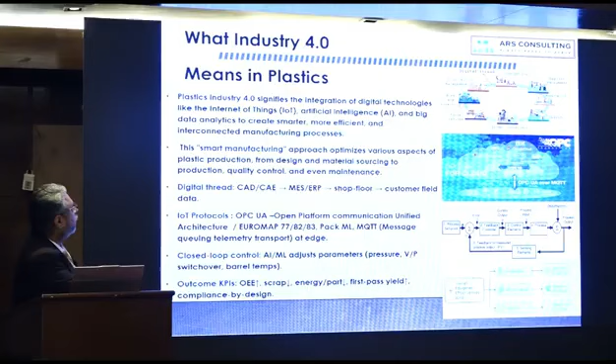Now, what exactly does Industry 4.0 mean? Industry 4.0 does not just mean integration of software into things.

It is a simple term, smart manufacturing. Everyone does manufacturing. How do we reduce rejection, improve productivity? Already there are many QS systems available, many systems available. How can smart manufacturing be achieved?

That is what we are going to talk about in Industry 4.0. Now, why exactly does AI/ML matter in plastics? AI and machine learning are crucial today, not only because of competition, not only because of getting obsolete, but also because it transforms traditional manufacturing into smart factories. Today, maybe Toyota, maybe Honda, or any car manufacturing unit, everyone is going into smart manufacturing. Then why not in plastics?

So here the most important aspect today is sustainability and regulations. That is EPR and recycled targets, and the opportunity for sustainability is reducing scrap, energy, downtime, and improving quality.

Now, AI/ML can be applied into four major broad categories of plastics. One is injection molding, where we can do defect detection, cycle optimization, and energy efficiency. Extrusion, we can do thickness control, process stability, and real-time monitoring. Rotomolding has already been touched on in the previous presentation, one is temperature profiling and predictive quality control.

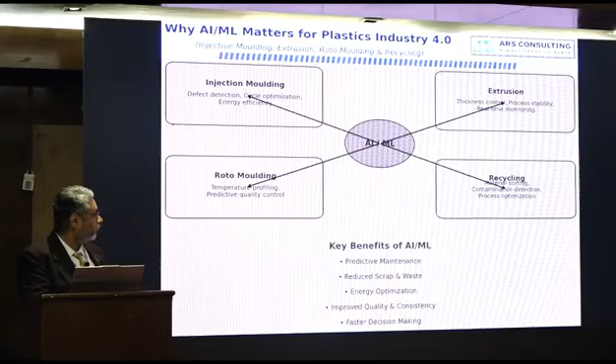Now, what are the myths? Everyone thinks that once AI comes, automation comes, our jobs will go away, manpower will be at risk, unions will form. Not really. It is still a myth. Why is it a myth?

Concern: automation removes jobs. Not really. In automotive AI, ML, IoT, it is just automating the task, but not the jobs. You need a programmer, you need a performer, you need a person to access the IoT. So it will not take away the job.

Second, it reduces the operator need. Not at all. Operators become smart machine operators. So we are elevating the operators. We are not taking away their jobs.

Third, data replaces decision making. Not at all. Data just supports human management. Ultimately, the human resource is the one who decides.

Fourth, machines control everything. Not really. Humans train the machine. The machine does not train itself. Humans train the machine, monitor and optimize the machine.

Last, as I said, everyone's job will go away. Not really - loss of employment doesn't happen; upskilling happens in AI and ML, and reallocation of manpower. So if anyone says AI/ML will take away jobs, we can confidently say no, not at all. In the plastic industry, we are creating smart manufacturing, so it will create more jobs for human resources.

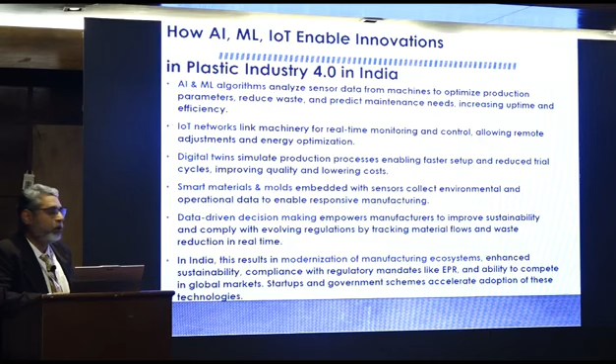Next, data-driven decision making. As I said, whenever we need a decision to be made - whether this particular shift, this mold we are running, is it really effective, particular rotomolding process, yes there is thickness control - that decision making needs data. That data is fed by this AI/ML. So in India, most of the modernization of manufacturing ecosystems is now getting enhanced with sustainability, compliance, and regulatory mandates like EPR. So that goes with AI/ML.

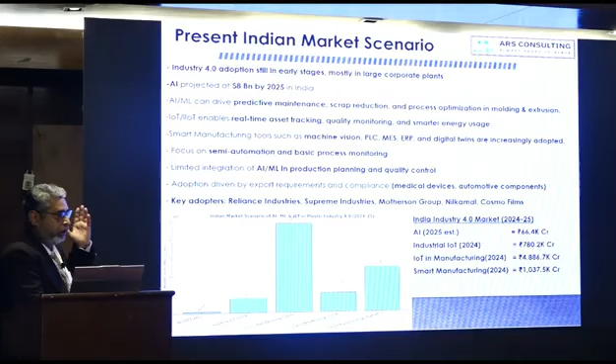Next, present Indian market scenario. We talked about global, now how it works in India. I have got the data from valid and trustworthy sites, marketing research insights.

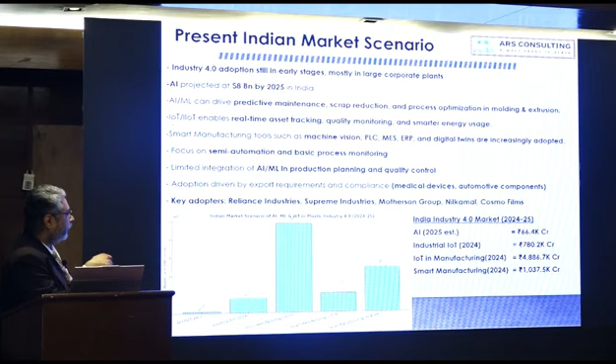The AI potential is around 66,400 crore, industrial IoT is around 780 crore, IoT market potential is around 4,886 crore, and smart manufacturing is around a 1000 crore market. Venturing into this definitely involves higher capital and resources, but the market is really growing.

Next is open platform communication unified architecture, which does machine to machine communication. If we have say 100 machines on a shop floor, it is not possible to communicate from one machine to another manually; that job is done by AI/ML. This is what we call open platform communication unified architecture. Two specific softwares, Euromap 77 and Euromap 83, have been built on OPC UA to define the interface between the injection molding machine and manufacturing execution systems.

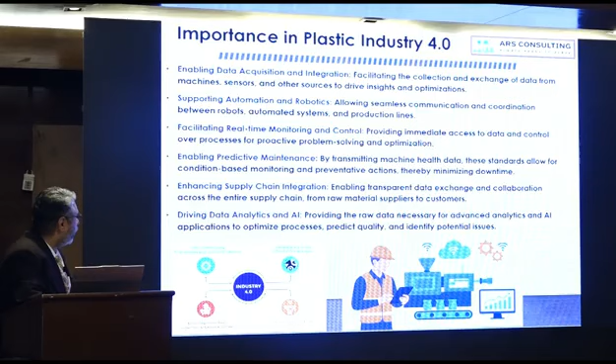Now, what is the importance? Again, enabling data acquisition and integration. Next is facilitating real-time monitoring and control. Third is enhancing supply chain integration and driving data analytics and AI.

Now let me give a brief on how injection molding can be implemented with this AI so that it really works as smart manufacturing.

High data density per cycle - say for example, as Sandeep sir mentioned, there is so much data: clamp force, melt pressure, cavity pressure, screw position. All this data can be fed into the system, so that we don't have to search for a manual or anything.

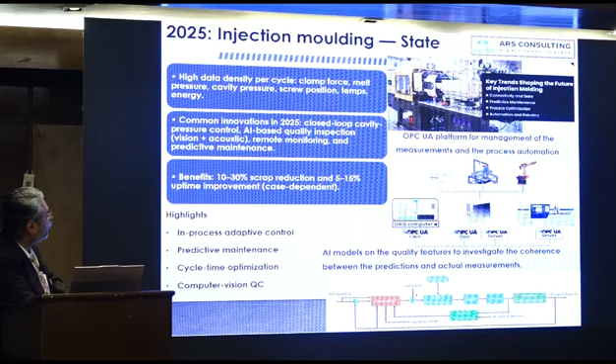Next, the common innovations: one is closed loop cavity pressure control, and AI based quality inspection, meaning we don't have to visually inspect the components. Through software, we can have a closed loop system to control quality, and remote monitoring. Before any unforeseen circumstance or upset happens in the machine, that can be handled through predictive maintenance.

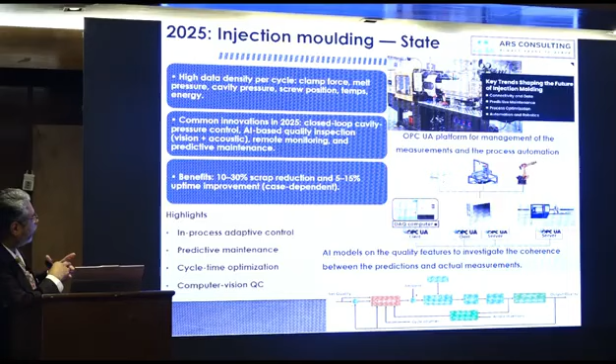What is the benefit in injection molding? I'll cite examples as well - there is a 10 to 30% scrap reduction, and 5 to 15% uptime improvement.

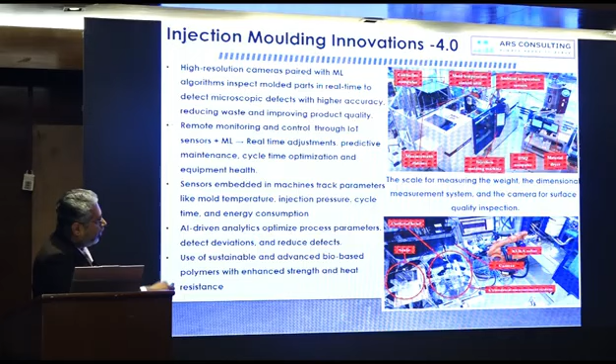Now these are a few specific examples I have given - hope this is visible. These are the areas where AI has been applied: the scale for measuring weight, the dimensional measurement system, and the camera for surface quality inspection. If we depute a QA person for each activity, we need at least 6 to 7 people to do that. But if we depute an AI/ML system, it does everything together in one shot.

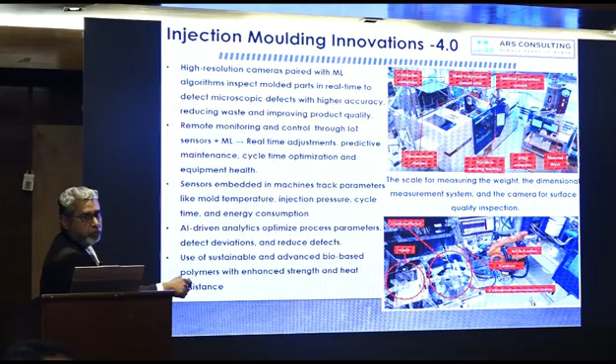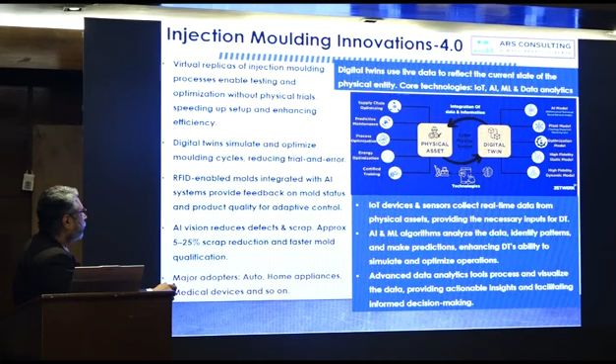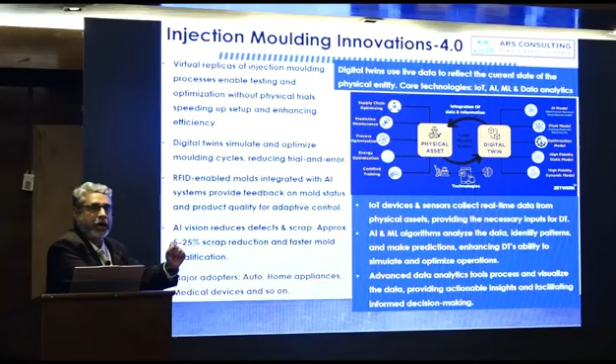Next, RFID tags can be attached to the components. Suppose if there are 30,000 components made which go into the assembly line, and any particular part is found to be defective, that can be retrieved through RFID tags. Through a manual batch process, it would be very difficult for us to track it.

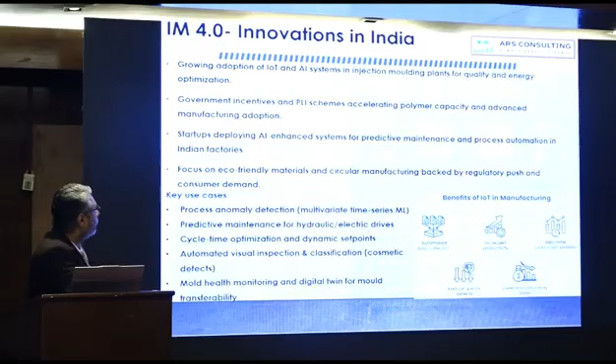Next, what are the innovations happening in India? One is the growing adoption of IoT and AI systems in injection molding plants. Second is many startups - I'll give examples and case studies in the coming slides. These provide AI-enhanced systems for predictive maintenance and process automation in Indian factories.

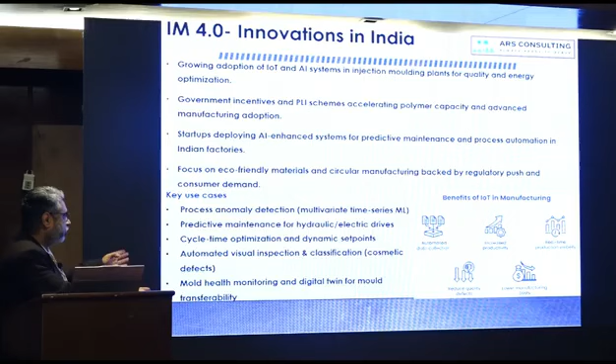What are the key use cases? One is process anomaly detection. Second is predictive maintenance. Third is automated visual inspection. Fourth is mold health - when a mold completes, say for example, 5 lakh shots or 10 lakh shots, that health monitoring can be done by AI/ML itself.

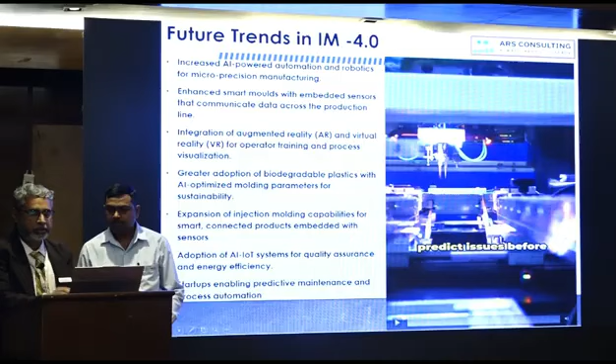Let's talk about IoT, the Internet of Things. Sensors on machines collect data and send it to the cloud. This means faster problem solving and less downtime.

Next up, AI and machine learning. These technologies predict issues before they happen, making your factory more efficient and cutting costs.

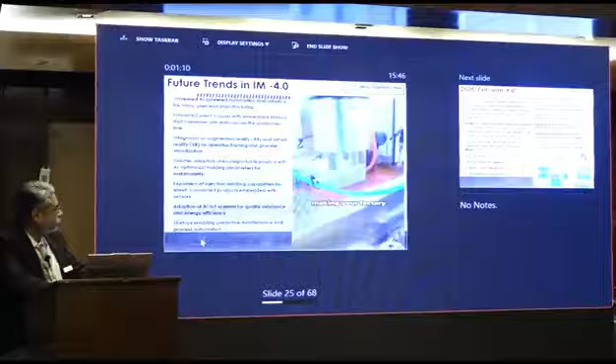And don't forget about robotics. Robots are taking over repetitive tasks, freeing up humans for more complex work.

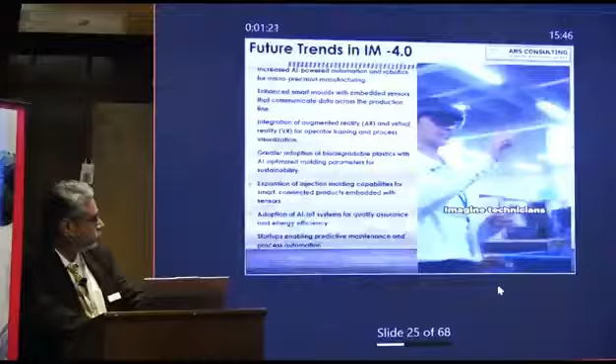Finally, augmented reality. Imagine technicians using AR glasses to get real-time repair guidance. It's like having a tech guru by your side.

Industry 4.0 isn't the future, it's now. Get on board and transform your factory today.

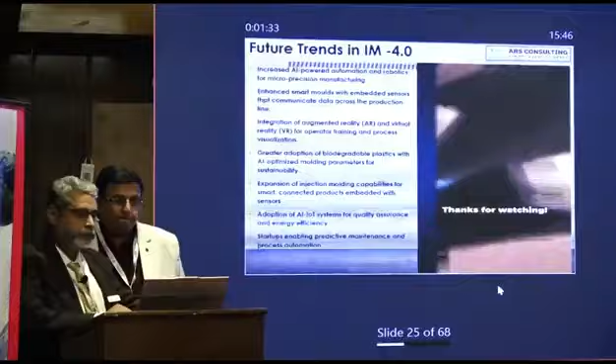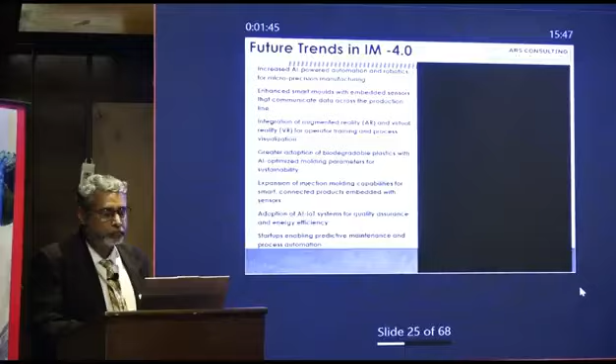I'm done with the injection. Let me go with the extrusion. Extrusion is enabled with AI, ML, IoT and automation.

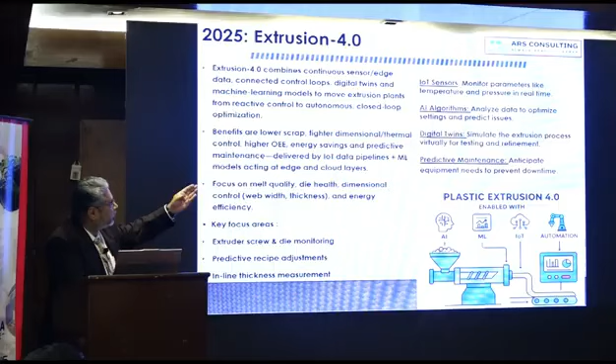Here again, IoT sensors monitor parameters like temperature and pressure. Algorithms optimize the settings and predict issues. Digital twins do the testing and refinement, and predictive maintenance prevents downtime.

I'll just cite a few examples, maybe pipe or profile or anything. This intelligent optimization processes sensor data to identify patterns, predict defects, and adjust machine parameters.

And digital twins create virtual models. Suppose you have any specific profile or specific model to be done, that can be done through digital twins. That is a modeling thing.

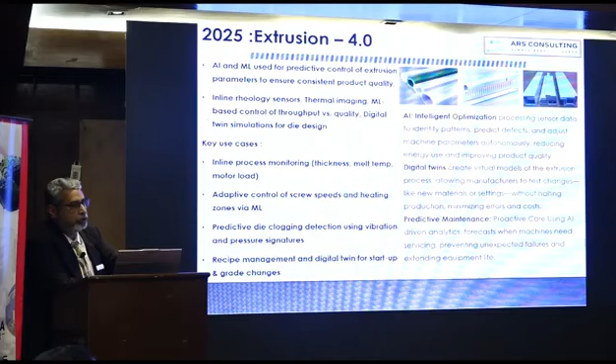What are the core components of extrusion? Same as whatever we have seen in injection, the same thing is available in extrusion 4.0. These are all the parameters required for implementing this 4.0.

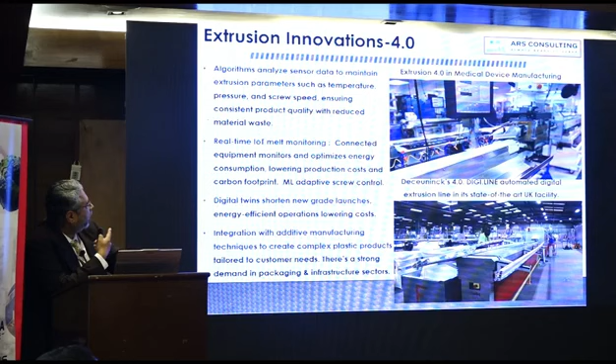Algorithms analyze the sensor data to maintain extrusion parameters. Then real-time data for IoT melt monitoring - whenever there is a melt temperature monitoring or any process temperature, that is done by IoT.

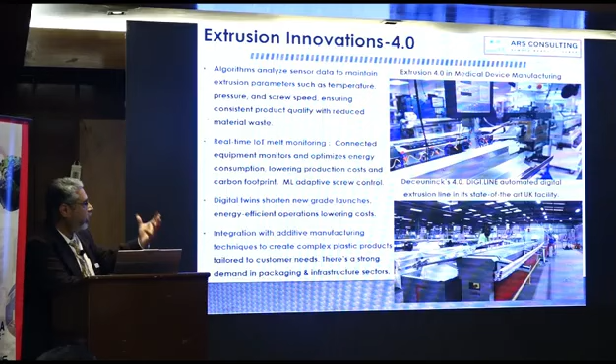Digital twins shorten new grade launches, and there's integration with additive manufacturing. Say for example, you want to create a new plastic product, new design - that additive manufacturing 3D software can be incorporated with this extruder. Next, innovation in India.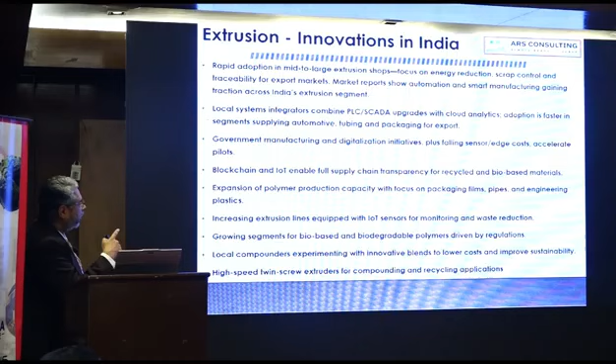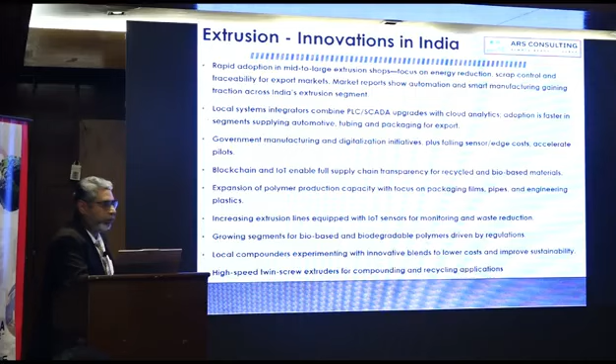Then blockchain and IoT enable the entire supply chain, starting from incoming raw material to outgoing - the entire thing can be monitored by blockchain and IoT. And increasingly extrusion lines are equipped with IoT sensors for monitoring and waste reduction.

Next, future trends - what are the future trends ahead in 4.0? One is North America and APAC - they have high penetration of digital twins, and larger OEMs and tier 1 suppliers are implementing AI ML in that. And development of new sustainable materials, especially in recycling, is also implementing this AI ML.

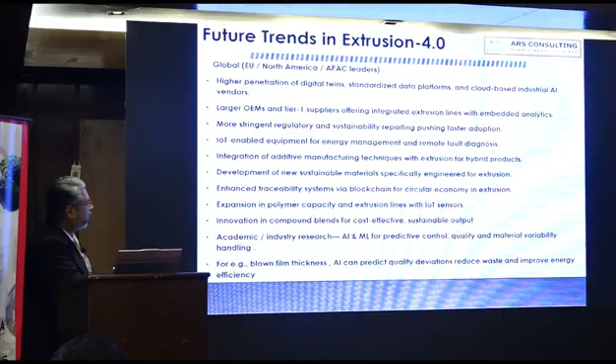Next, rotomolding - how we can implement this AI ML. Historically, it is a low automation process. Rotomolding is well known, but it shows a rising interest in oven and rotation control automation, and also fill weight monitoring, robotized demolding and finishing, and digital process logging.

The key use cases can be: one, oven profiling and energy optimization using IoT ML. Next, fill weight control and inline gravimetric feeders. Next, automated finishing and inspection using machine vision. Then predictive maintenance, as we do in injection and extrusion - in rotomolding also it's possible.

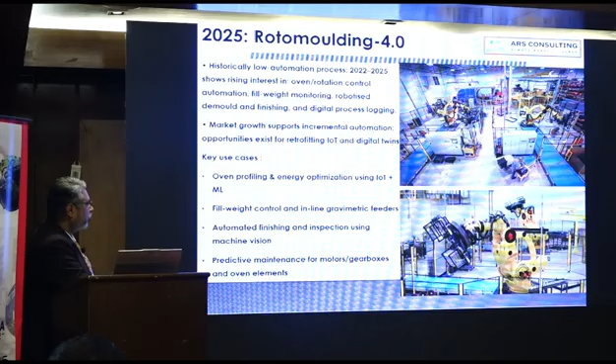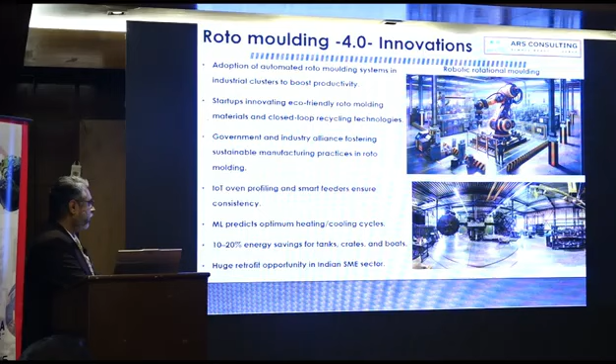A few innovations have been implemented, like startups with eco-friendly rotomolding materials using closed loop recycling technologies. This has been done in Europe, but in India it is yet to be done. Machine learning predicts the optimum heating and cooling cycle, facilitating 10 to 20% energy savings for tanks, crates and boats applications. The most important thing is it's a huge retrofit opportunity in the Indian SME sector.

Next, rotomolding innovation may be rotoline variants like shuttle, carousel, rock and roll, sphere oven. They have shown some improvements.

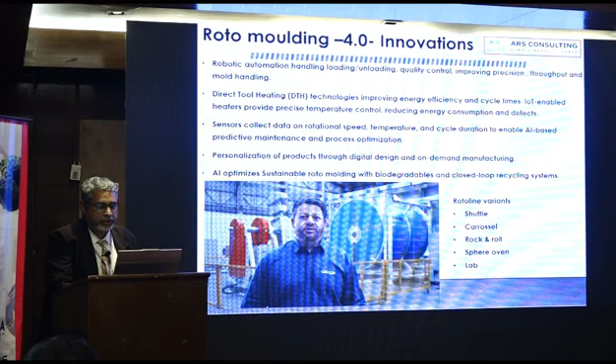Shuttle machines are capable of producing any part in polyethylene. The machine is divided into three main parts: a central oven and two carts. This setup, with an independent recipe for each cart, allows efficiency in the production of many parts. The shuttle machine is the best option to manufacture parts of different shapes.

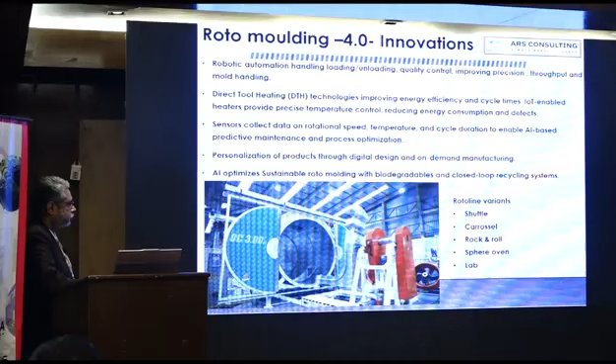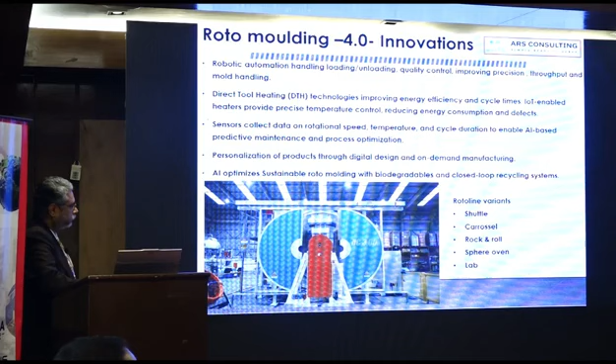The shuttle machine has a cylindrical oven to guarantee efficient airflow throughout the process. Also, the oven structure is sealed to prevent heat loss, resulting in gas consumption economy.

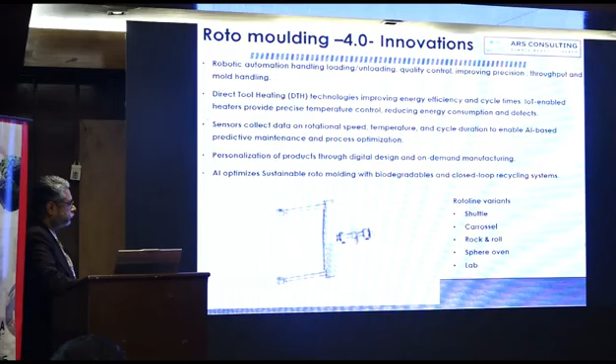The standard machine is equipped with straight arms which can be replaced with an offset L or offset C. The arm speed can be programmed on the recipe screen. You can also program temperature, oven time, and reverse rotation.

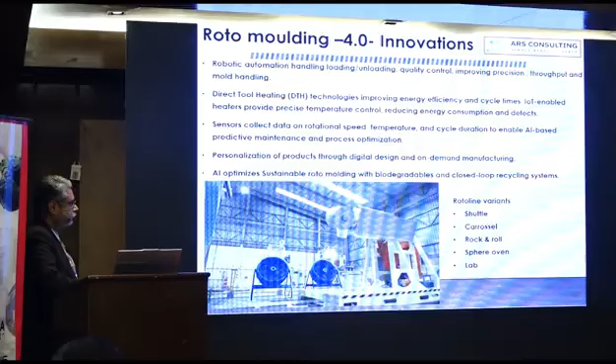The machine has cooling fans on each station. The air assist cooling developed by Rotoline has a continuous water and airflow, preventing water accumulation in front of the fans and speeding up the cooling process.

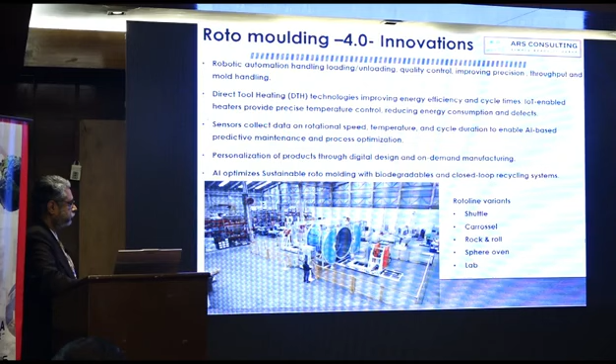The equipment goes through strict manufacturing, quality, and testing control. Installation is always supervised by a Rotoline technician, with fast and efficient technical assistance in three languages: English, Portuguese, and Spanish. Panel connections are made with quick disconnect plugs, reducing machine installation time.

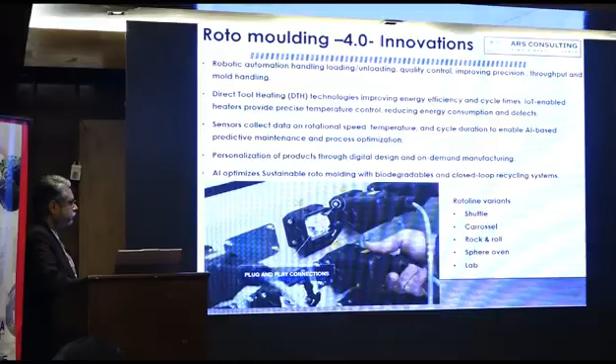To facilitate the operator's routine, the interface includes a computer with a navigation system that is easy to operate using a mouse and keyboard. The software can display a lot of information such as fault log, diagnosis, product information, and PLC inputs and outputs, among others. Now you know a little bit more about the shuttle rotational molding machine.

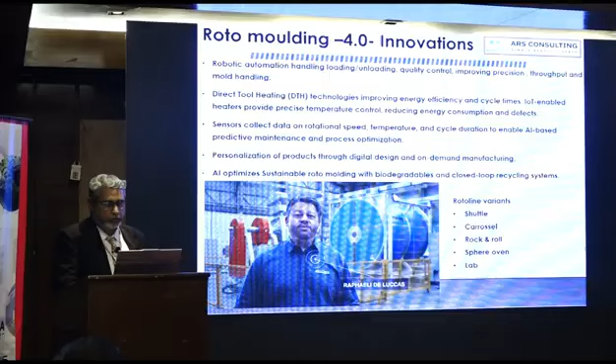Next, a rotomolding case study: the development of a specialized fuel tank for a groundkeeping equipment manufacturer. There was an issue in heat flow which needed to be focused on the appropriate area for improved material dispersion and improved threading.

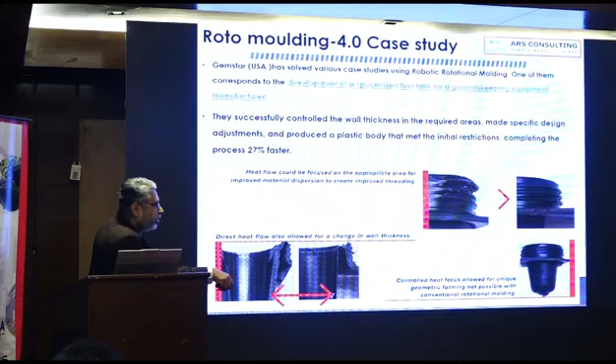There was also an issue with direct heat flow, which allowed for a change in wall thickness. After implementing controlled heat focus, it allowed for unique geometric forming, which was not possible in the conventional rotomolding process.

A few more innovations we've seen include smart sensors and Internet of Things, allowing operators to monitor performance remotely, and CNC machine enabled molds that enable the creation of more complex designs with tight tolerances and high dimensional precision.

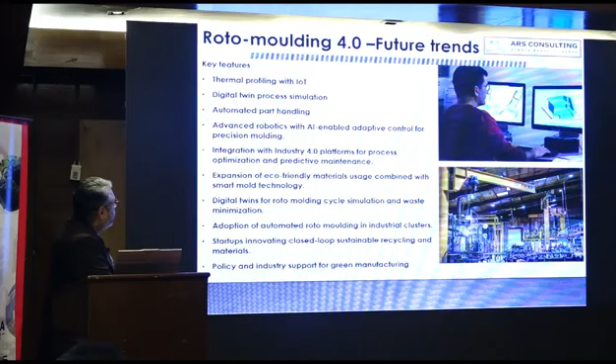Now, future trends: thermal profiling with IoT, digital twin process simulation, automated part handling, and integration with Industry 4.0 platforms for process optimization. Digital twins can be deployed in the rotomolding cycle for simulation and waste minimization.

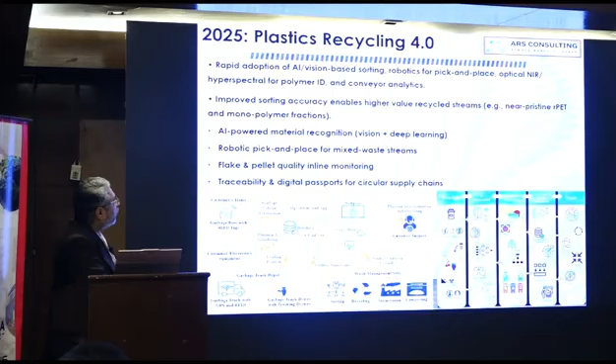Now, for 2025, in the recycling industry: one process is sorting the incoming and outgoing material. Another is the rapid adoption of AI and vision-based sorting, robotics for pick and place, optical NIR and hyperspectral polymer ID, and conveyor analytics. These are all new technologies being implemented in recycling industries in Europe.

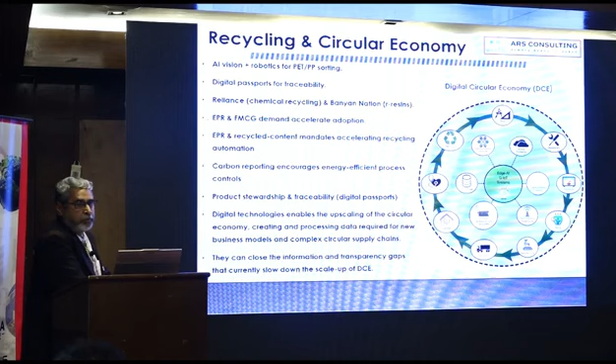There is a need for applying AI and ML, that is edge AI systems, into recycling. Carbon reporting encourages energy efficient process controls and product stewardship and traceability, that is digital passports from the scrap right to the end recycled product, which really facilitates the circular economy.

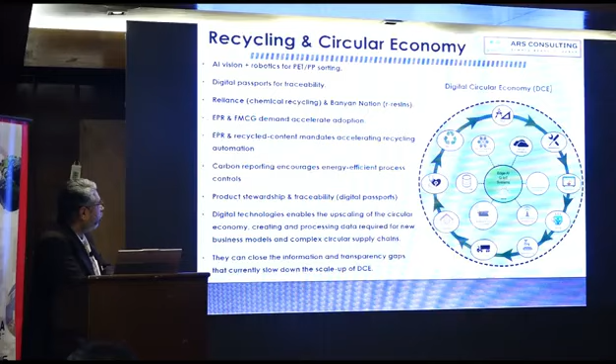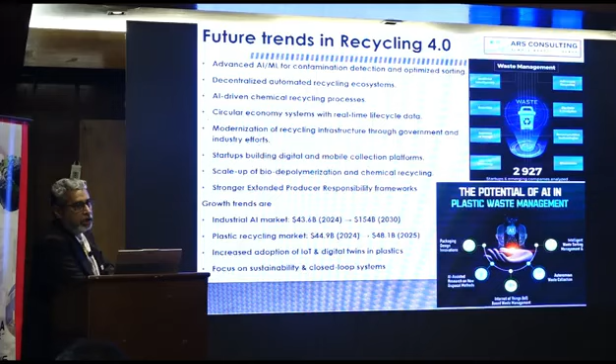Future trends in Industry 4.0 in recycling: waste management is going to revolutionize, scaling up biodepolymerization and chemical recycling as mentioned by the CIPET director. AI finds a vital role in this.

Impact and return on investment for plastic Industry 4.0: we have an analysis of AI versus plastic Industry 4.0. Looking at AI manufacturing here versus estimated plastic industry growth, there is a phenomenal increase in this domain.

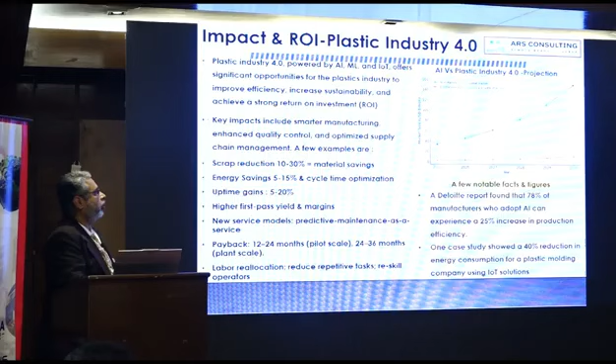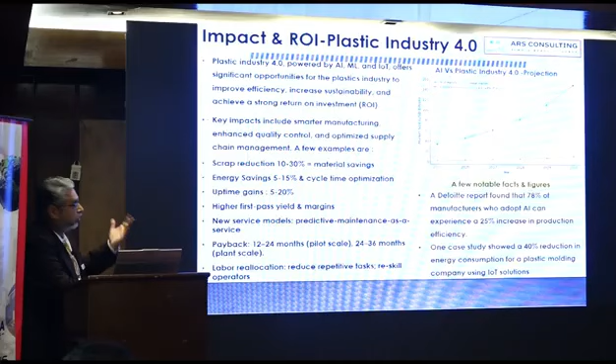The blue line shows the growth trajectory from 2025 to 2030 is very fast. This will enable scrap reduction of 10 to 30% in material savings, energy savings between 5 to 15%, cycle time optimization, and uptime gains between 5 to 20%.

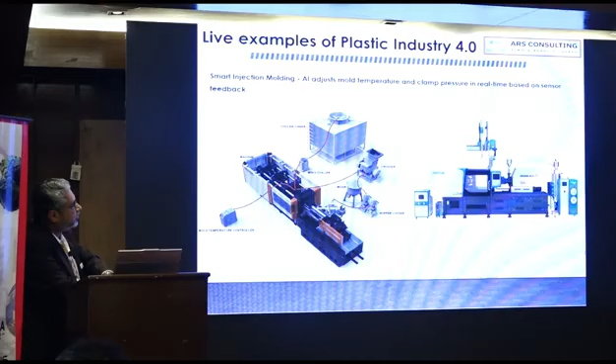How does it work? One is generative AI in product and mold design. The trend is it will give optimal mold designs based on mechanical strength and weight reduction.

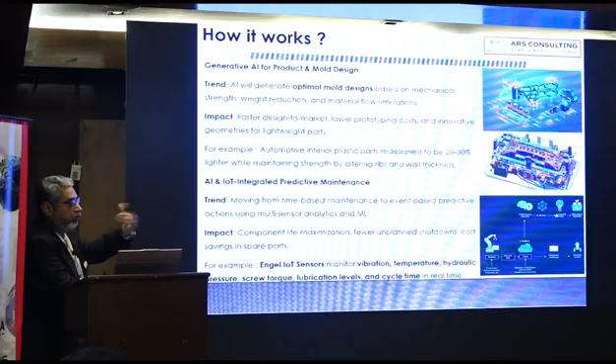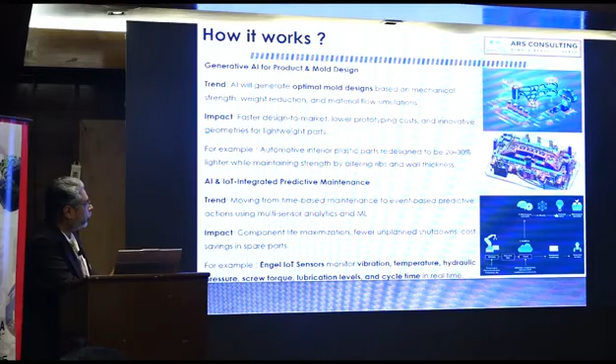Next, the impact will be faster design to market. It will reduce the time, instead of doing a prototype and then conceiving a full-fledged mold. And moving from time-based maintenance to event-based predictive maintenance, that can be done with AI/ML.

All are applicable in all kinds of injection molding process, recycling, or roto molding, any process.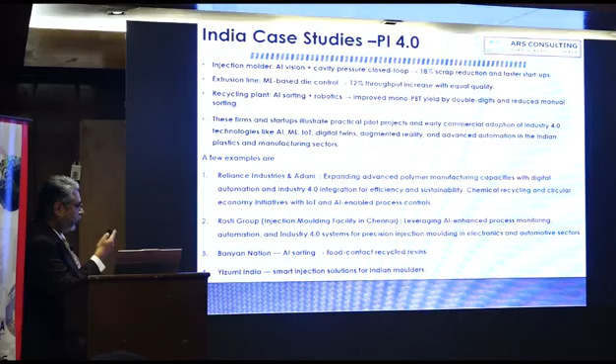They implemented AI sorting. Next is Yizumi India, a well-known company. They implemented smart injection molding solutions for injection molders, Indian molders.

Next is Recykal, again a Gurgaon-based company. They introduced a digital platform for plastic waste traceability and transparency.

Next, Schneider Electric, Bangalore and Hyderabad. They have integrated energy-saving IoT and automated solutions, especially for switch gears.

Then Siemens in Kalwa, Mumbai. They transformed via digital twin technology and IoT to increase their productivity and flexibility.

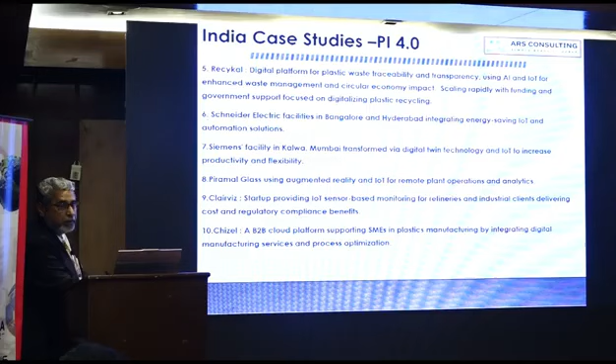Piramal Glass, even a glass company, has implemented AI. And Clairviz, a startup company, has provided an IoT sensor-based monitoring system. Chizel, a European company, produced a B2B cloud platform for supporting SMEs.

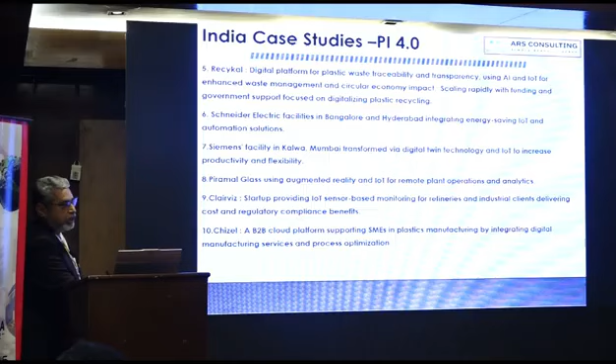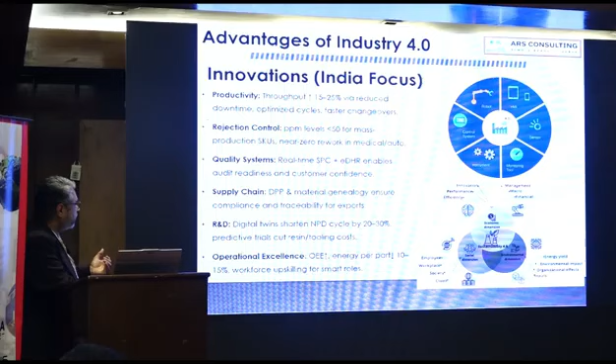What are the advantages? As we have already seen: one is productivity, second is rejection control, third is quality systems, fourth is supply chain, fifth is R&D efficiency, and last but not least is operational excellence.

Now, what are the challenges? Key challenges. There are 4 main challenges. One is ensuring the quality of the data. Data has to be rechecked.

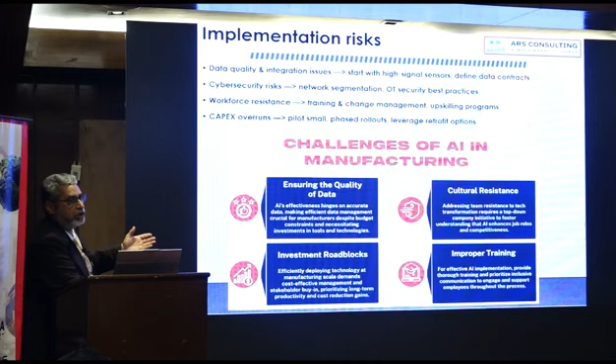Next, investment roadblocks. Most of the SMEs in India, almost 70%, are not in a position to invest in AI/ML because it calls for high investment. Next is improper training. We need a proper workforce to be upskilled to get this training.

What are the future trends? One is connected machines. As I explained in the second slide, Euromap and OPC UA have open communication standards which enable various kinds of technologies.

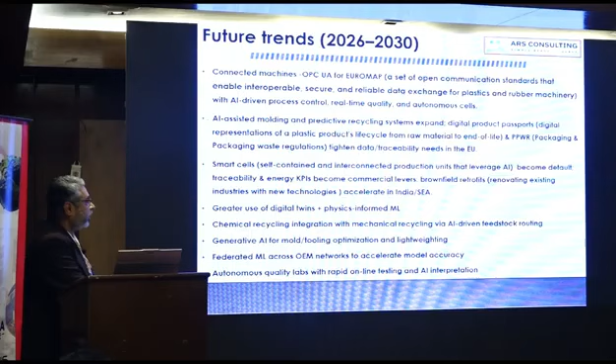Second is smart cells, that is self-contained and interconnected production units. Third is greater use of digital twins and physics-informed ML.

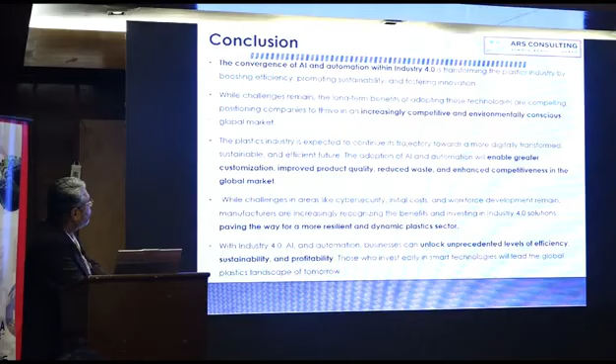Conclusion: the convergence of AI and automation with Industry 4.0 will definitely transform the industry with customization, quality, reducing waste, and enhance competitiveness in the global market.

So join us in the revolution of the Indian plastic industry 4.0 with innovation, by engaging with us, sharing ideas, and embracing new technologies. Let's be part of an ecosystem of innovation and work together to implement this in the coming years. Jai Hind. Thank you.